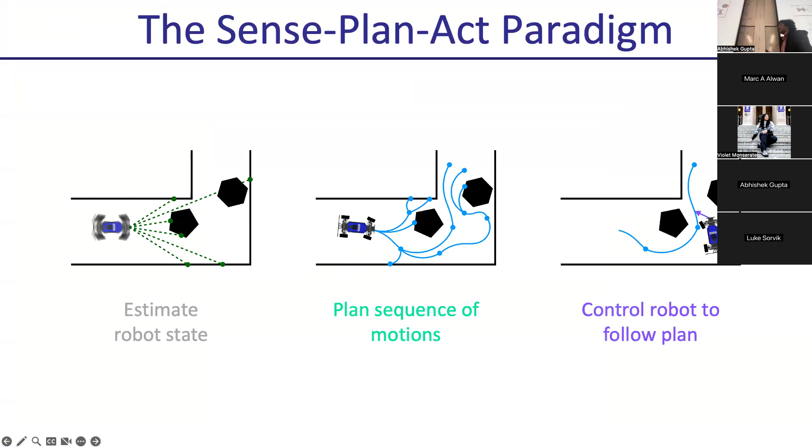So. Okay, so quick recap. I'll blaze through it. Tell me which parts I need to stop at. We talked about sense, plan, act, right? And we're thinking largely about control once you have a plan and a state estimate, right? And so specifically, we're thinking about feedback control. So a control system where you know the error between where you are and where you want to be, right? And so you measure the error between where you are, where you want to be, and try to take actions to minimize this error, right?

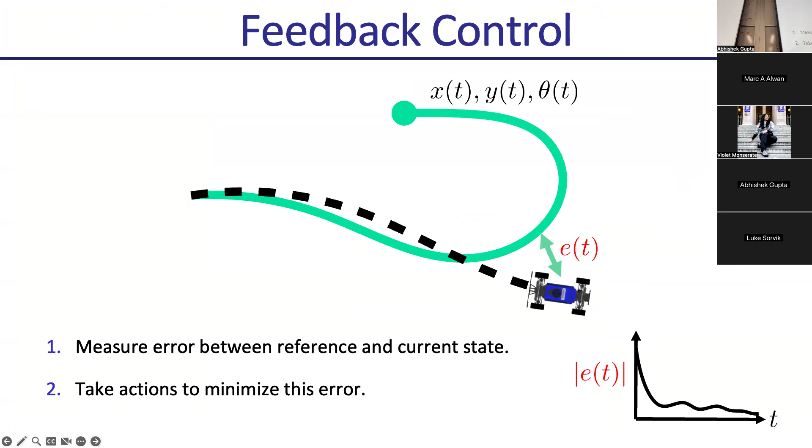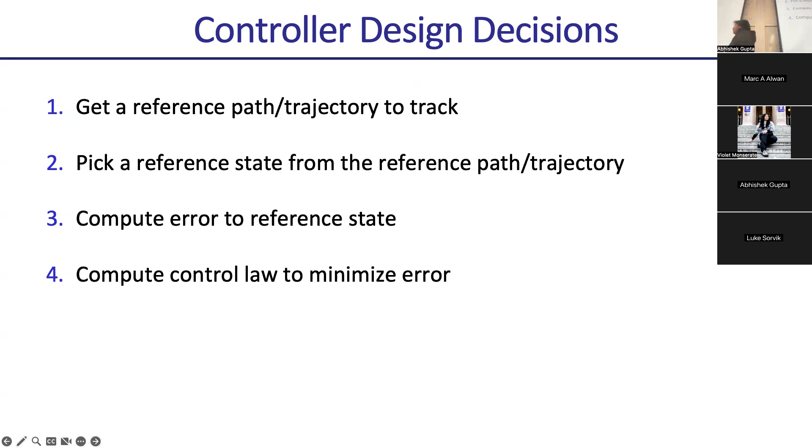And so we're trying to think of controllers that look like this, which gets a reference path or trajectory to track. You pick a particular point you're trying to go back to. You take the error between your current state and the reference state, right? And then you try to design a control law which minimizes this error. So it takes action so that your error becomes smaller, right? And so our focus today is going to be in designing this control law. So K here is a function that takes an error and gives you actions, right?

And so we're going to be trying to design the form of K, which is going to work generically across systems and specifically for the car, right? So PID control, which we'll talk about, is a very general system. A general control law works across lots of systems, whereas pure pursuit is very specific to the car, right? And so we're going to start with PID control, and then we'll get to something specific for the car.

And in general, we're going to think about a restricted setting where we don't change the throttle, we just change steering. And so if you remember last time, there was cross-track error and along-track error. If you can't change the speed, you can't change the along-track error, you can only change the cross-track error. Right? Because you can only change which way you're going. And so what we're going to do is try and change the steering angle so that we minimize cross-track error. Yeah. Okay.

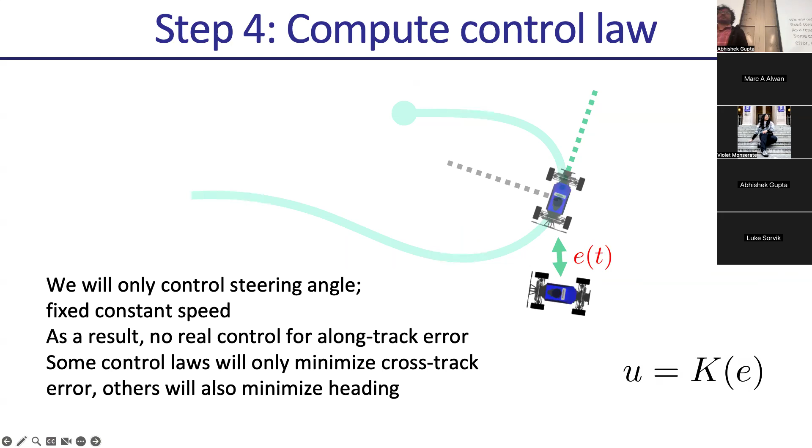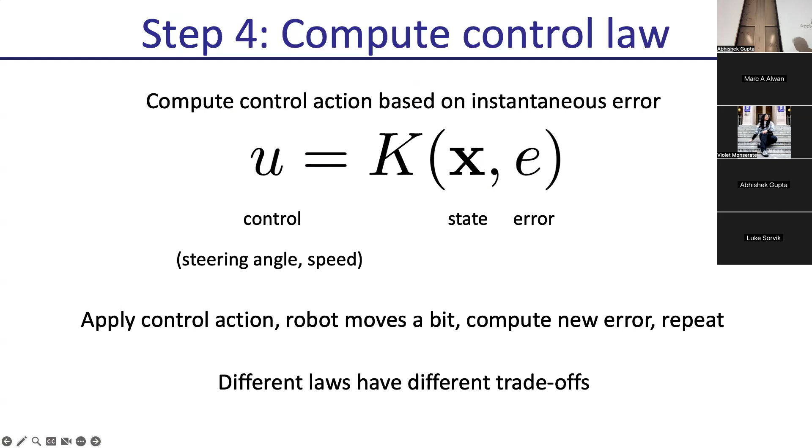So the basic design of a control law is you're trying to find out what U is, dependent on the current state X and the error between your current state and the desired state, right? And the desired target. And you're going to do this with feedback, which means you're going to apply the control law, you're going to move a little bit, and you'll apply this control law again, right? And so whenever you think of a closed loop system, it's going to have this kind of thing where you repeatedly apply the control law rather than just apply it once. And so that's the general space of things we're going to cover.

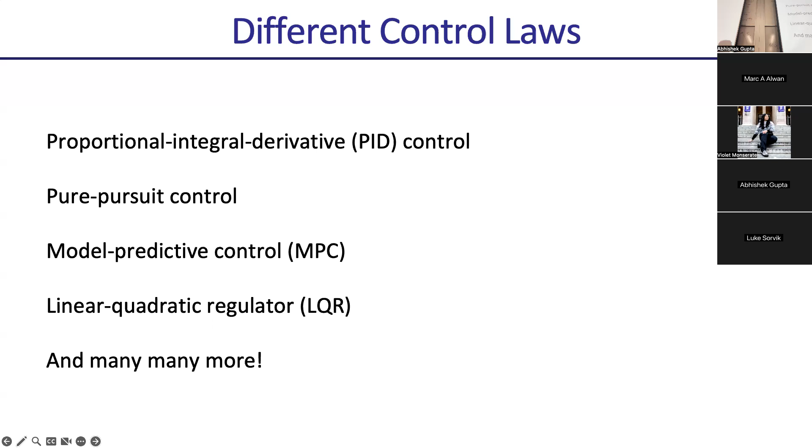We'll talk about PID control, then pure pursuit, then a more general space of things called model predictive control, which means you're going to keep replanning. And then we'll have LQR, which is a special case, which is quadratic and linear, and so on, right? So I think we've covered some amount of PID. You guys covered bang-bang control, is that right, last time? And then we'll cover PID, pure pursuit, and so on. That's a strange name, I know. But yeah, so we'll quickly recap bang-bang control, go through PID and pure pursuit. Yes? Tell me if my scoping is wrong because I wasn't here last.

Yes? Okay. So bang-bang control is really, really simple. It just says that if your error is positive, go negative. If your error is negative, go positive, right? So it's just saying that if you're this way, go that way. If you're that way, go this way. That's it. And you always set the actions to the max actions. And so you're always saying that if you're all the way to the right, you take the max action to go to the left. If you're to the left, you take the max action to go to the right. Now, what's tricky about this? What happens?

So as soon as you go across the line, you suddenly have to turn, but you overshoot. Right, exactly. So you start having behavior which looks like you kind of do this kind of thing, right? So you'll see wild careening around, and you'll never stabilize your system, right? And so stability is usually saying that you want your system to go to a fixed point, which is often set as 0, in the limit of time, right?

So different types of control theory are all about stabilizing systems, and so you're trying to stabilize your system to the 0 point, and bang-bang control is typically not stable, right? So it's never going to go to 0 error. And so the challenge with bang-bang control is that if you run this control, you tend to have error that never goes to 0. You go too far to the left, you go too far to the right, you keep repeating.

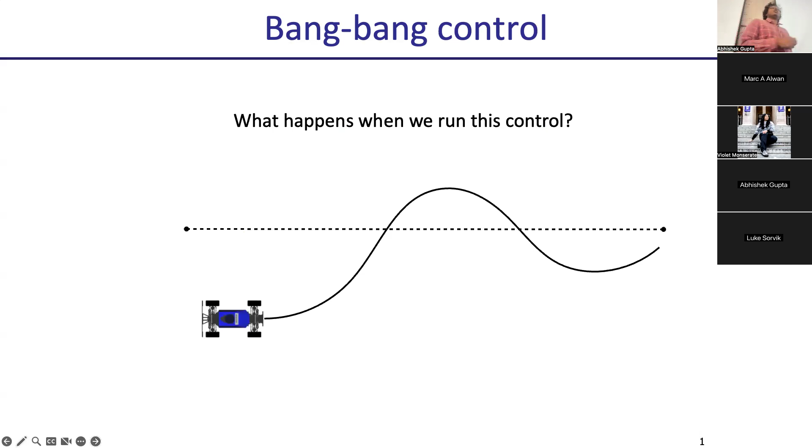So, okay. If we were to fix this, how do we fix this? We want to avoid this unstable, back and forth behavior. What do we do to make it better? Thoughts? Yes. As we get closer to the stable state, then we need to correct less, I guess. Yes. We dampen off this. So if you go back to this rule, what would you change? Make that proportional to the error. Make that proportional to the error, right?

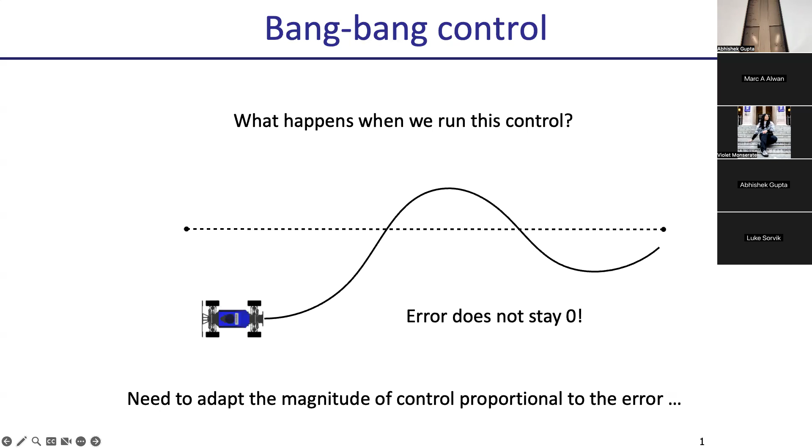And so the key point that Dhruvan is just talking about is, right now what's happening is over here, we're applying a big force, but over here, we're also applying a big force. Whereas over here, maybe we need to only apply a little force. And when we're here, we want to really apply 0 force. Right? And so our 0 actions. And so what we're going to do in PID control is we're going to adapt the magnitude of our control proportional to the error, not just max this way or max that.

Okay, so we want to do better, and that's where PID control comes in. So PID control is all about how do we build things proportional. It's called the proportional integral derivative controller. It's a PID. How do we leverage the magnitude of error to control how we move, right? And so basically, maybe Tyler told you about this, but almost every control system uses some type of PID somewhere. All our robots use PID controllers underneath. So even if you're doing deep reinforcement learning, there's still PID underneath in most cases, right? So it's useful to know.

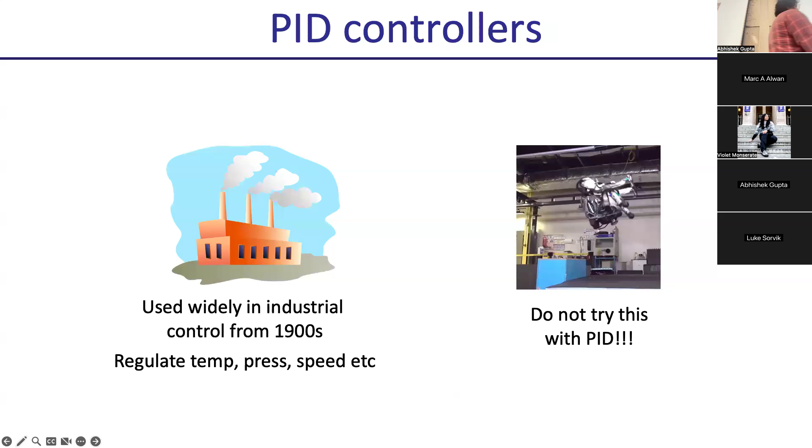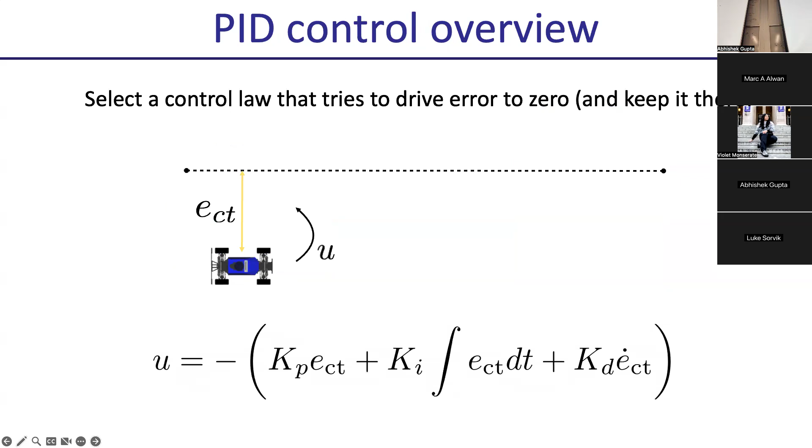The caveats here are it's great in certain cases. Don't do backflips with a PID controller. It's going to lead to problems because it doesn't really capture dynamics in a very nuanced way. Right? So don't use it there. Okay, so the crux of PID control is that you're trying to choose a control law that brings your error to 0 and keeps it there. And so PID controllers look something like this. It's going to be a proportional term, an integral term, a derivative term, right?

And so you can kind of think of this, it has a Christmas carol flavor to it. It's like a present, past, and future, right? And so this is your current error. This is the error that you accumulated in the past, and this is the error that you expect to have in the future, right? And so it's very similar to a spring damper system, if you ever heard of those in physics. This is kind of like your force, this is like your damping, right? And so it's got a similar flavor to spring damper.

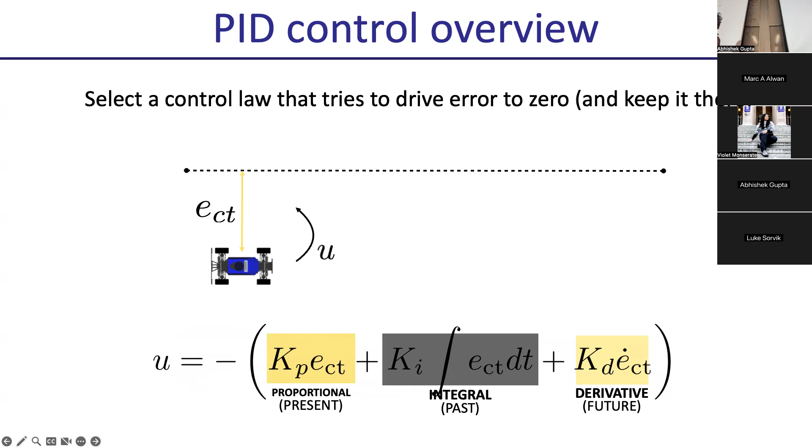And you can kind of think of it as, this is your set point of your spring. You're trying to design your spring so that it stabilizes like that, right? And so whenever I think of PID control, I think of it as a spring damper system. Okay, so we're going to have a proportional term, integral term, a derivative term, right? And so let's try to work through each of these. So the proportional term says let's minimize the current error. You have some error, you want to get back to this 0 point as quickly as possible, and so you're trying to minimize the current error.

What the integral says is if you're accumulating error, try harder, right? So it means that I've tried pretty hard with my proportional term to get to 0. It's not happening. Try harder, right? So the integral term is really connected to an idea called adaptive control. And adaptive control basically says that you have a control rule. If your control rule is not getting you to where you want to be, change the control rule, right? Whereas proportional control is not changing the control rule. The control rule is always linear in error. But integral control accumulates error, and so it's inherently adaptive.

And derivative is kind of like brakes. It's like damping, saying that if I'm going too fast one way, just slow it down and try to not have wild instability in your control. So you can kind of think of your proportional term as doing a lot of your heavy lifting.

And then your integral term is trying to reduce steady state error. Reduce steady state error means that if you're trying to converge to this point and you're not converging, it forces you to converge. And you can think of your derivative as preventing this kind of high frequency behavior, right? So it tries to penalize high frequency behavior. That makes sense intuitively?

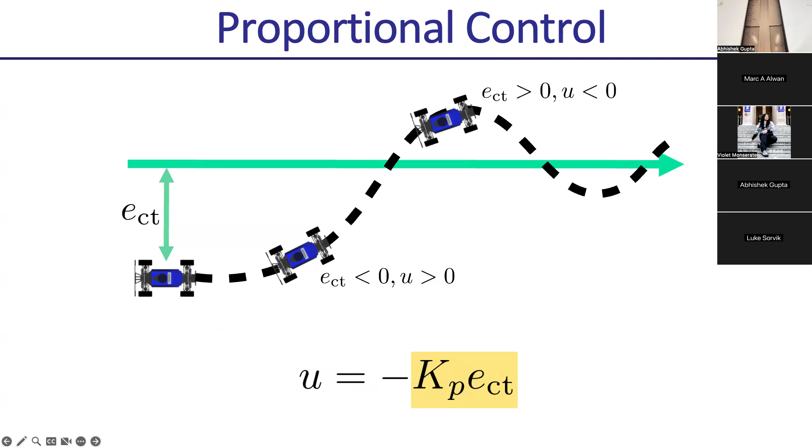But if you look at the amplitude of this, it's going to be smaller. And usually most of these systems will do something like that, so it goes to zero over time. And in a certain set of conditions, you can show that the PID controller is stable. Okay, so this thing, KP, is often called your gain. Let's try to understand what happens. You're going to tune the gains in your next homework.

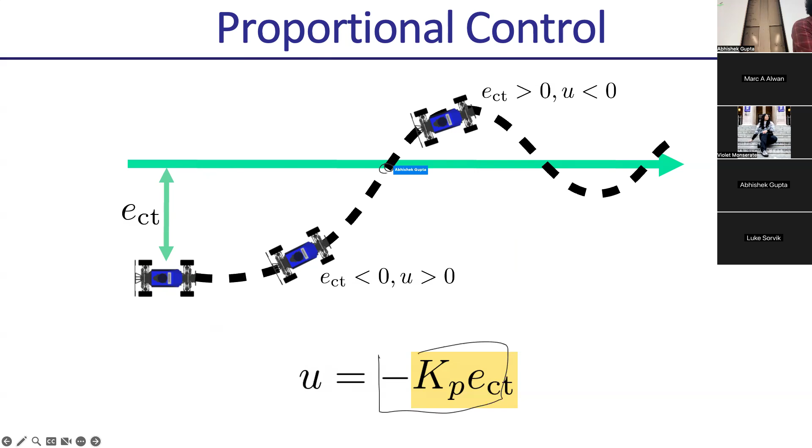So what happens if the gain is really high? Yeah, it oscillates more. Think of it as a spring which has a huge spring constant. So if your gain is really high, your force is going to be quite large, but because you have momentum, you're going to overshoot more. So you have a system that will tend to overshoot, that looks something like this, and have high oscillation.

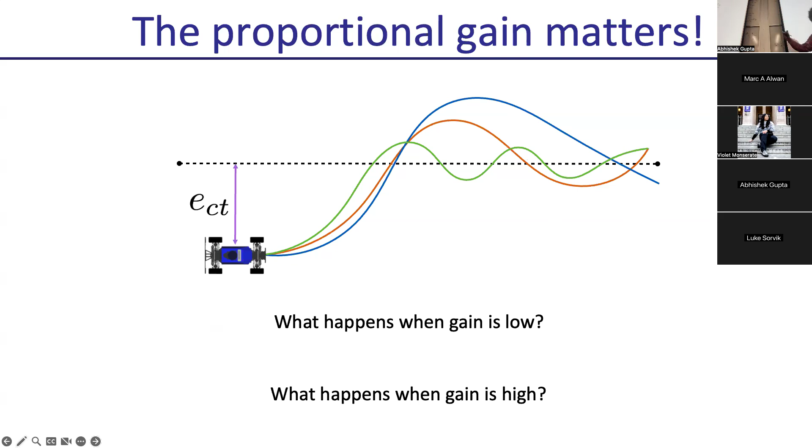Whereas if your gain is low, it's like a loose spring. I'm trying to go back to the middle, but I don't have enough force to overcome my momentum, so I'm just going to swing around, go slowly. So you can think of low gain as not as much oscillation, but slowly getting to the optimum. Whereas when the gain is too high, you get to the zero point fast, but then you oscillate a lot. That's the way to think about the P term.

One way to think about it is if your gain is too high, it's like a cat chasing its own tail. You go here, and this sends you all the way here, and this sends you all the way here, and you keep going like that.

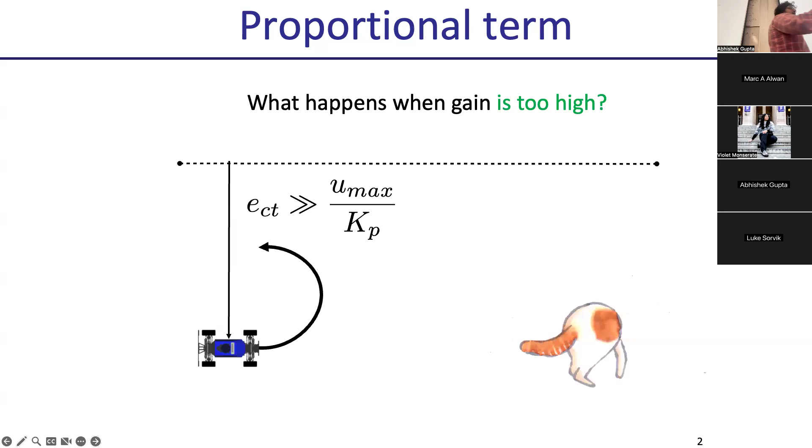So if you ever run your systems and find that they're jerky, like if you're running a robot arm and it's jerky, try lowering the gains. But if you're finding that your arm doesn't reach where you want it to reach, then up your gains. So just a simple linear tuning. Okay. That makes sense? The P term. Any questions?

Solid. Okay, so the next thing is the I term, which is interesting. So the I term says that it's an adaptive controller. It's the integral, which is saying let's sum up the error over the past some number of time steps, right? And it's using something proportional to that error. So it's saying, again, it's negative Ki, but not times the current error, it's times the historical sum of the error. So why does that make sense? Where would that help?

So you're going to have some steady state error, which in a chemical plant may mean that you just get stuck at some point which is not your set point. Or a robot arm gets stuck somewhere which is not the place you want to go because of forces on your system, or disturbances. And so what this guy is saying is, let's say you had wind and Kp fighting each other and this error was non-zero. So you have some non-zero steady state error.

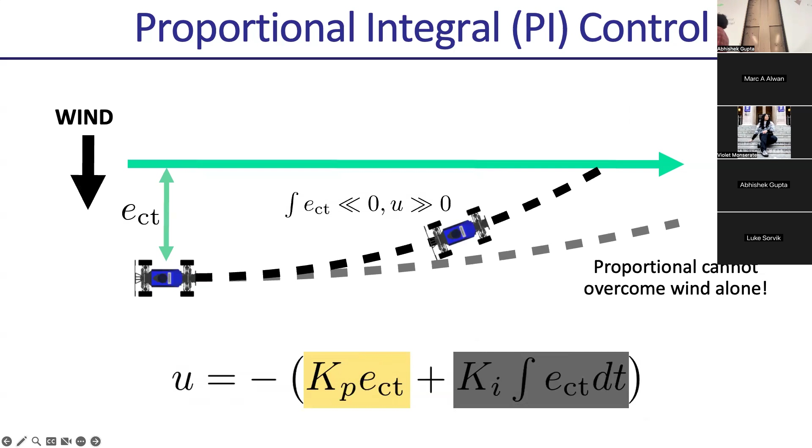So what we're saying here is that if you have a system which has some steady state error due to a disturbance, what the I term lets you do is overcome that steady state error. Your I term is not going to dampen your oscillations or anything like that. Your I term is really saying, hey, your output didn't converge to where you want it to be. And so it's going to give you that extra bit of juice that's going to get you to your set point.

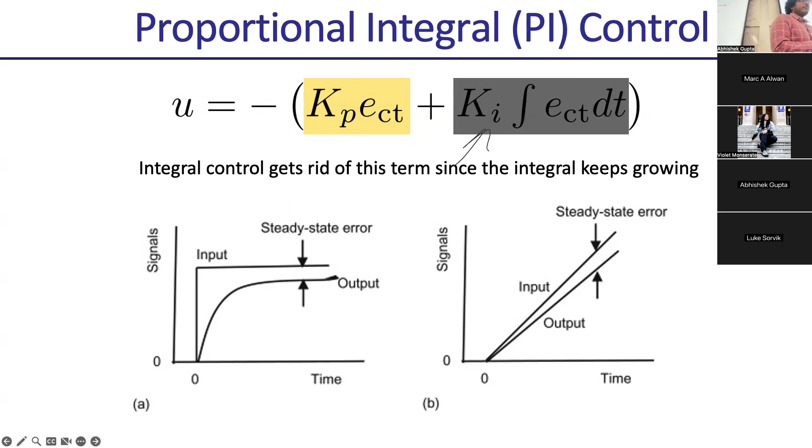The way I like to think about it is this thing is going to keep growing until your e(t) is zero, at which point this remains constant. It's an integral, so if e(t) is zero, it remains constant, which means this term doesn't grow, and you stay at your set point. So you can think of it as a little bit of extra force. Now there are more sophisticated ways of doing adaptive control. This is a linear way of doing it with an integral. You can also have a nonlinear function, and a lot of reinforcement learning is trying to get these kinds of adaptive controllers with nonlinear functions. Okay.

But that's integrals, right? And then the last thing we have is the derivative. So that's Kd times e dot, where e dot is the rate of change of error. In some sense, the rate of change of error is telling you what is your predicted change in error at this instantaneous point, and you're trying to penalize it. So if you're going too fast one direction, it's going to apply force in the other direction to slow you down. It's like the damping in a spring damper system. It's saying, hey, you're zooming too fast to the middle, chill out, slow down, right?

You can think of an integral as a sum of things in the past. You can think of a gradient as predicting the future - it's a gradient with respect to time, an instantaneous prediction of what the next step is going to be. So you can think of this as a term which prevents big oscillations, and it's trying to get you to converge more smoothly to the steady state.

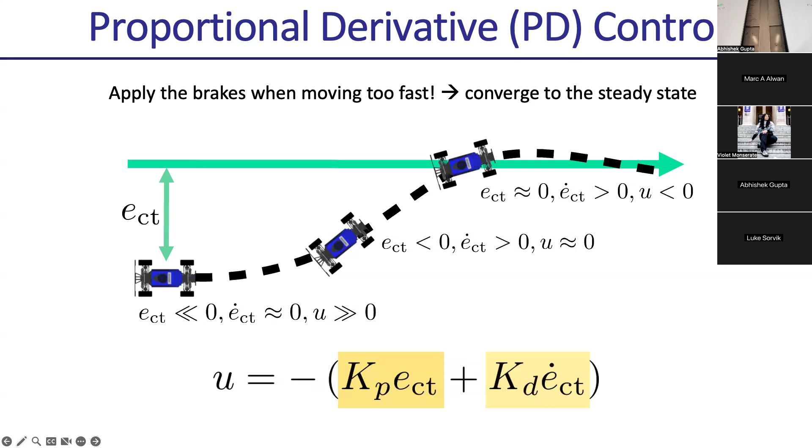The derivative term is KD times ECT dot - remember, this is cross track error. So how do we compute ECT dot? Whenever you say dot, that means derivative of ECT with respect to time. So you want to compute the derivative of ECT with respect to time. How would we do that?

Really, basically take where you were some amount of time back, predict that you will - that's right, so it's numerical differentiation. You basically say, hey, you were here at ECT at the current time step, you were here at some time step before, minus delta t. You take ECT minus ECT minus delta t, divided by delta t, which gives you your derivative - it's just numerical differentiation, often called finite differences. You're taking a finite difference in time, and you can compute the gradient.

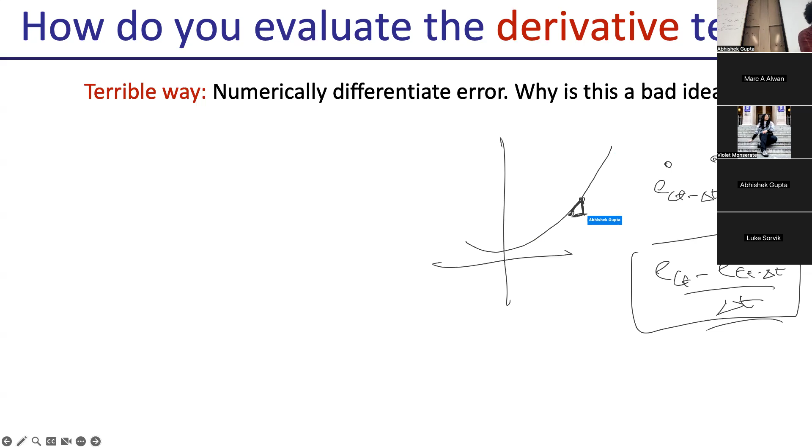So if you imagine you had a function and you want to compute its derivative, you can take this point, take this point, look at their difference in value, and divide by how different the points were - that gives you the gradient. You can do the exact same thing here, but as I've written up here, it's not a great idea.

Why is it not a great idea? Your sensor readings may be noisy - this high variance thing propagates. So what we're going to do instead is analytically compute the derivative, because we know this system. If you remember the way we computed it last time, you took x minus x ref, y minus y ref, and you had a rotation matrix. So you know what ECT is going to be, which means you can take its derivative.

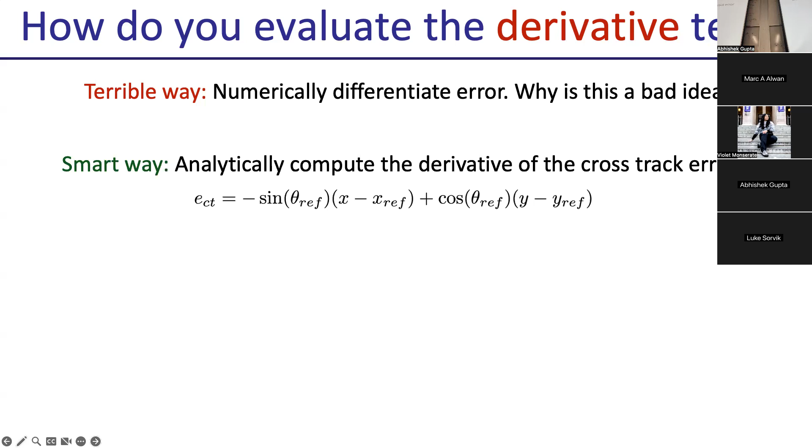So to take its derivative, you take the gradient of this thing with respect to time. Some things here are constants - x ref, for instance, is a constant, y ref is a constant. So you can say the gradient of this thing is going to be minus sine theta times x dot, plus cosine theta times y dot. Let's work it out slowly: ECT is minus sine theta times (x minus x ref) plus cosine theta times (y minus y ref).

Or theta ref - now this is a constant, so the only things that change with time are x and y. So what you'll get here is that if you take the gradient, it's going to give you minus sine theta ref dx/dt plus cosine theta ref dy/dt. And that's the first step. Then if you remember what we did in the motion model, dx/dt was just v cosine theta, and dy/dt was v sine theta.

You're just projecting the velocity along x and y. Remember the car was going like this, so the velocity was this way. You say that the change in x is v cosine theta, change in y is v sine theta, right? You just project it onto the right axis.

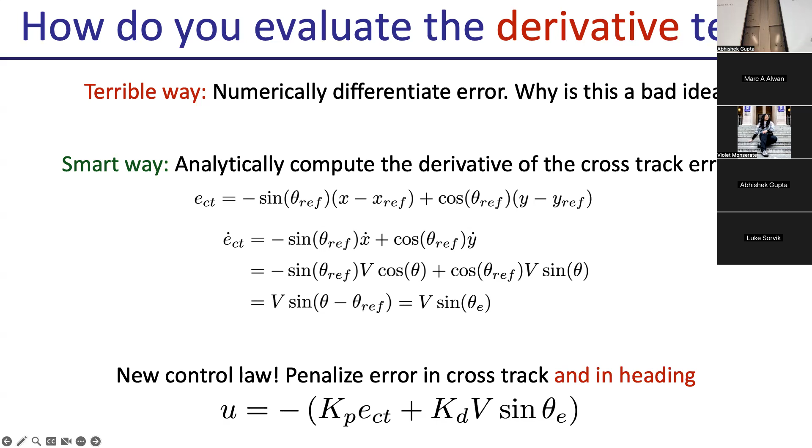You don't have to do any numerical stuff, you can just replace it by V sine theta, right? So in your homework and so on, when you're doing PID error, just replace your derivative term with V sine theta. So that's kind of why we're using the derivative term.

Now a challenge here is that, as Marc was talking about, there's potentially lots of noise and variation. And so what happens with noise and variation is it's hard to separate signal from noise, which means your gradient may appear really high even though it's not. And so sometimes when you have this kind of sensor noise or actuator noise, your D term leads to huge control variations because your gradient is high, but not because the system is moving too fast, more because there's just noise in the sensors.

And so often you will actually drop the D term because it's sensitive to really noisy things. So in practice, a lot of controllers we use in the lab are just PI controllers, and they don't always have the D term.

Okay, so some intuition here is that your proportional term says minimize the current error. Integral says if I'm accumulating error, try more. And derivative says put on the brakes, slow down, right? So that's the whole of PID control.

Questions? Yeah. For defining the actual rotation based on... So this is to control the steering angle. Right, so we're only saying you're only controlling the delta.

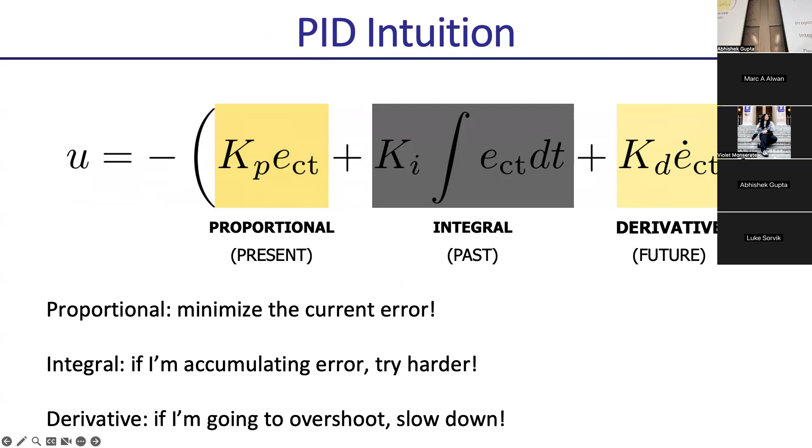Like if you're finding that you're just not getting to the point you're at, up your I term. If you're going too fast and oscillating, maybe increase your damping term, right? But in general there's a bunch of literature on this.

We're not going to go into too much detail, but one of them is called the Ziegler-Nichols method, where they have a heuristic rule that looks something like this. It's totally heuristic, just done with experimentation, but the procedure kind of looks as follows.

You start by just setting a P term. You set Ki and Kd to 0, right? And what you're going to do is allow your system to go to a steady state and kind of oscillate, right?

And then what you do is you set the command to a step function or to 0. You increase the Kp term until your system goes and oscillates. You use that to determine the frequency of your system, and that is used with these rules to set your Ki terms and your Kd terms.

Right, and so I don't have a great explanation for it, except they tried a bunch of stuff and one of them worked, and that's it. But there's a bunch of methods like this that allow you to tune the PID controller. So in your homeworks, if you're feeling adventurous, try it out.

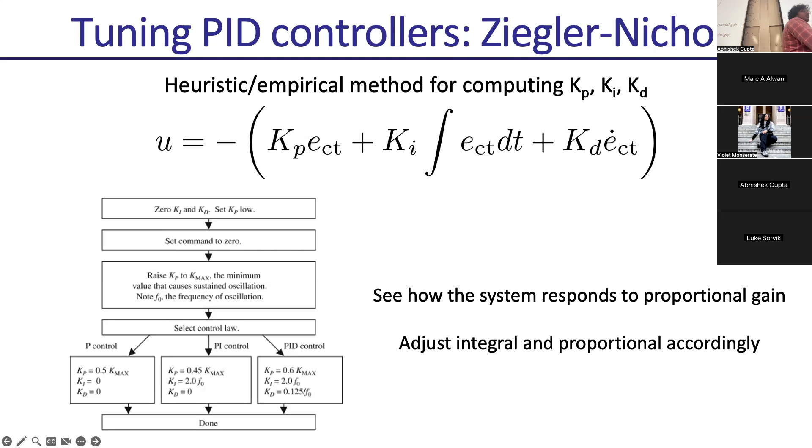Cool, so that is PID control. How do you feel about it?

Easy peasy? Good, alrighty. So the next thing we're going to cover is this thing called pure pursuit.

Pure pursuit is a form of lateral vehicle control, but it's a way to control specific vehicles like cars and planes. You can think of it like a carrot on a stick: you set up a target, try to go towards it, then you move the target. You're always chasing a carrot on a stick, giving yourself a target in front, trying to reach it, then the target moves, and you keep following the goal.

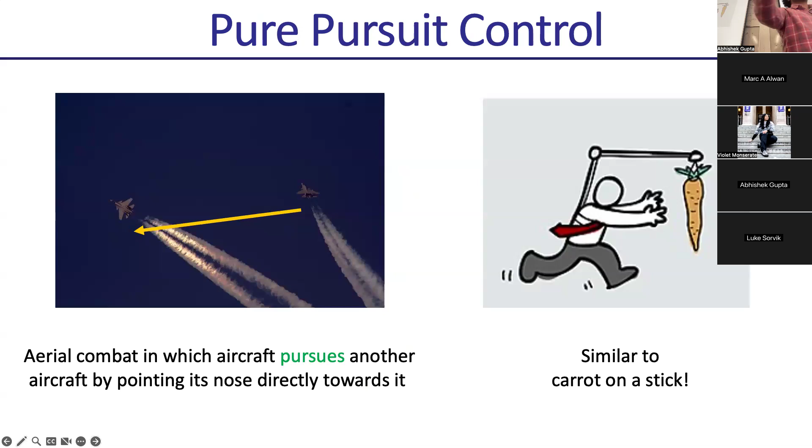An analogy the original paper uses is following an aircraft: you point your nose towards it, the aircraft moves, you point your nose towards it again, and repeat. So it's literally pursuing.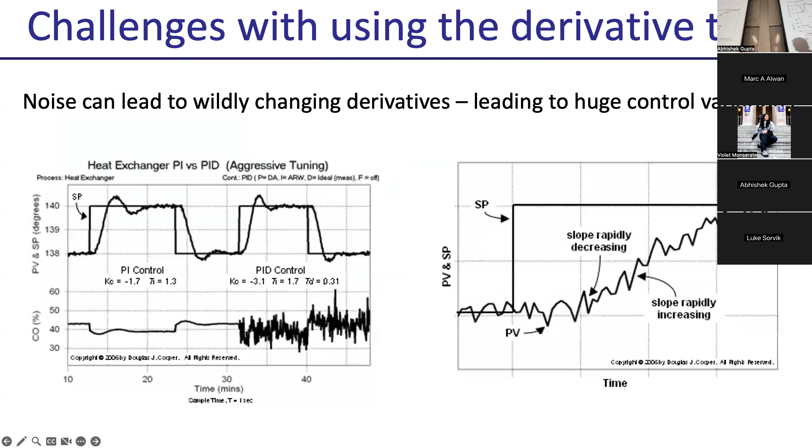So why do we need pure pursuit? Well, the problem with PID control was that it did not use the model at all. You can apply a PID controller to any system. If you look at PID control, there's nothing about the model, it only has to do with the error. It's just a heuristic line follower: if you're this way, go that way. But it doesn't use the model at all.

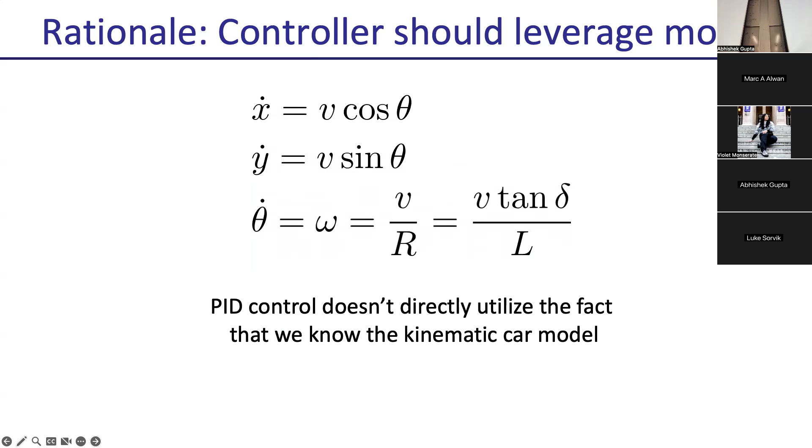What pure pursuit is saying is, hey, you're in a system where you know the model, so why shouldn't we use it? If you have the model, use the model. Whereas with PID control, it's really general, it works across lots of systems, but it doesn't use the model. So the motivation behind pure pursuit is to build a rule that follows paths for the car specifically. It may not work for other systems, but it'll work for the car.

The key insight here is the car is always just moving in circles. This leverages the fact that, if you remember how we derived our motion model, the car tends to move in a circle - there's an instantaneous center of rotation. So if a car is translating and rotating, you can think of it as rotating around an instantaneous center of rotation. We're going to leverage the fact that the car moves in circular arcs in order to navigate places.

One way to think about it: you have a path you're trying to hit, let's say this is your point you're trying to hit. What you can do with your controls is change the radius of this circle, trying to change it so that your arc intersects with the point you care about. So all that pure pursuit is trying to do is determine what your angle of steering should be.

What is your angle of steering so that the circle your car makes intersects with your lookahead point? All it's trying to do is inverse solve for delta such that the desired radius hits the lookahead point, the reference point you're trying to get to. So all we're going to do is a bit of geometry to get the radius of the circle that'll get us to where we want to go.

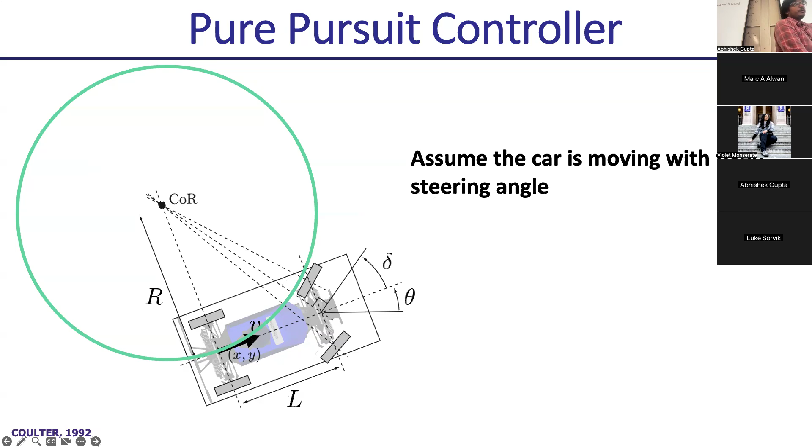Let's consider how we did look ahead: we were trying to choose a point to get to, which is not the nearest point, but a little look ahead. We can say the distance between (x,y) and (x_ref, y_ref) is equal to L - we're looking ahead to a point a distance L away. Just to avoid notational confusion, let's call it LD, because earlier we had the car of length L, so now we'll call it LD.

So how do we choose this? How do we choose a steering angle that gets the car to go through here? You choose a lookahead point, you get a steering angle that goes through there. Once you're there, you choose a different lookahead point, so you go through here, and a different one again after that. It'll trace out a path like that, but using the specific model of the car to do it.

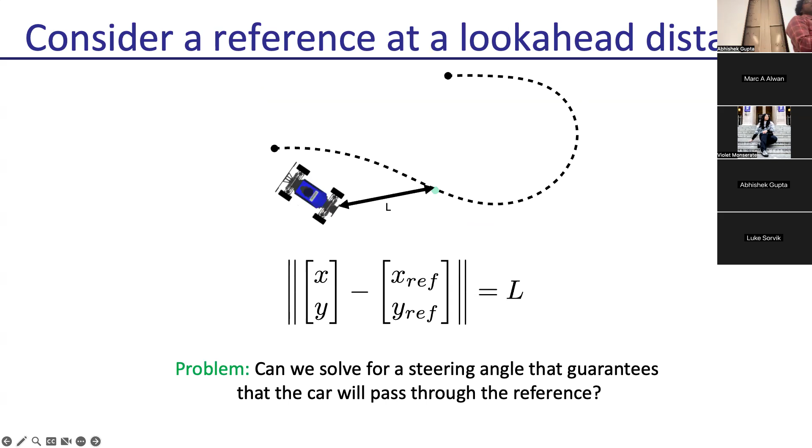And so the idea here is we want to solve for an arc that passes through a look ahead point, right? And as we move forward, the point is going to keep moving. So it's not that we're going to go here and stop. It's more that we're going to go here, move a little bit, the point changes, move a little bit, point changes, move a little bit. It's going to be relatively smooth.

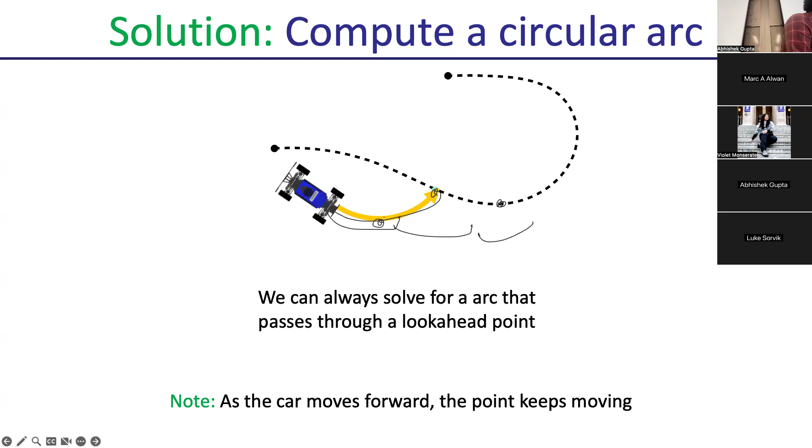Okay, so we're going to keep changing the look ahead. That's going to kind of keep us on a path that looks like this. So the procedure looks like: find a look ahead, compute the arc, move a little bit forward along the arc, right? Let it happen for a little while, and then go back to step one, recompute your look ahead, compute your arc again.

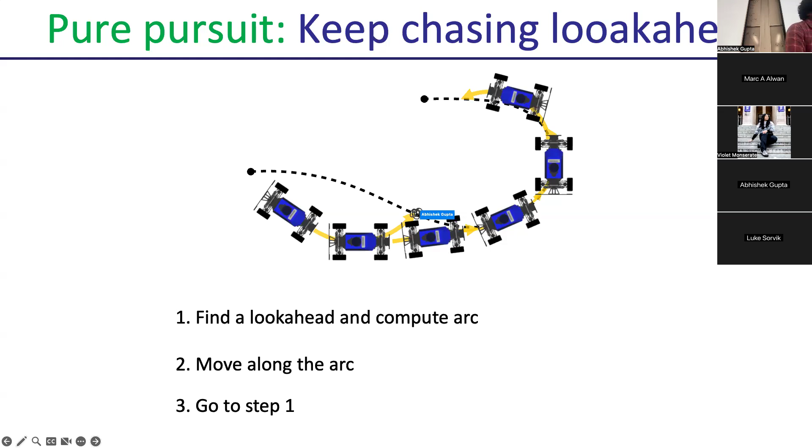Okay, so what we're going to try and do is just a little bit of geometry that's going to choose a radius that is going to take us through a particular look ahead point. Yep. Okay, so let's start by reviewing our motion model, right? If you're trying to find the center of rotation, we're going to say your velocity was v, your theta was the angle that your car is currently making from the x-axis, and delta is your steering angle, right?

So we said that x dot is v cosine theta, y dot is v sine theta. Theta dot, which is the rate of change of theta, is v over R, right? So this is the angular velocity, which is equal to your velocity divided by your radius, the distance between your car and the center of rotation. So those are things we already did.

And when we worked through some algebra here, we just said this was delta, this was 90 minus delta, this was delta, right? So if you remember what we did, we said tangent delta is equal to L over R, which means that R is equal to L over tangent delta, right? Which means that the radius that you pick is dependent on the length of your car and the choice of steering angle.

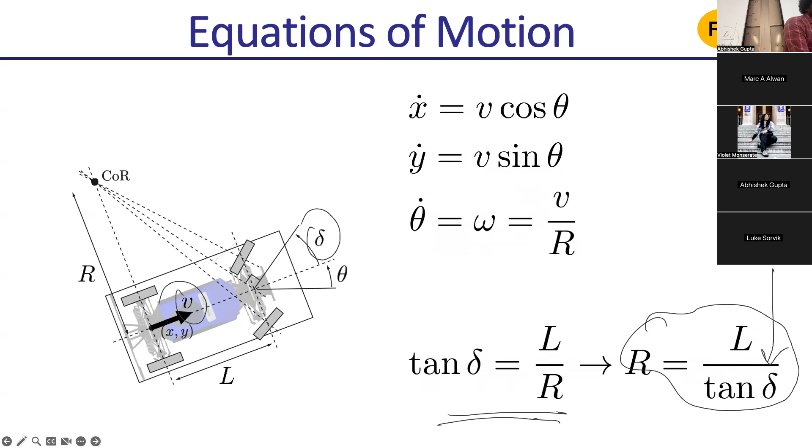Okay, so we know that R is equal to L over tangent delta. And we are going to try and figure out, in our case, how do we choose delta to intersect with our point? And so specifically, we're going to say, our car is here. We want to get through some x ref, y ref, right? And we're going to try and decide what the delta is to get there. And so we're going to do a little bit of geometry here.

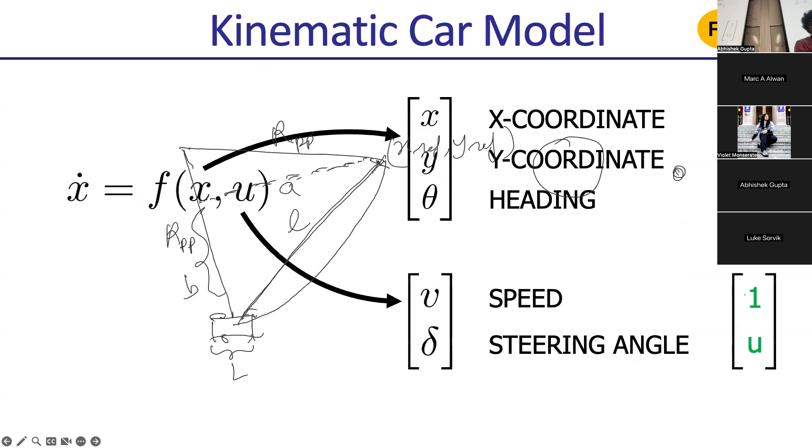So here's the logic. In our previous slide, we tried to get tangent delta in terms of L and R. But we don't know R. So we're going to try to write R in terms of things that we do know, which is x, y, the reference point. So we're going to express R in terms of x, y, x ref, y ref, so that we can solve for delta.

So the logic we're going to follow is we know from our motion model that tangent delta is L over R. We're trying to find the right R to get us to the reference point. So we're going to solve for R in terms of x ref, y ref, x and y. Once we solve for that, we substitute it in here, and you can directly get what delta is going to be. You get this into all known quantities, and then you know how to compute the control.

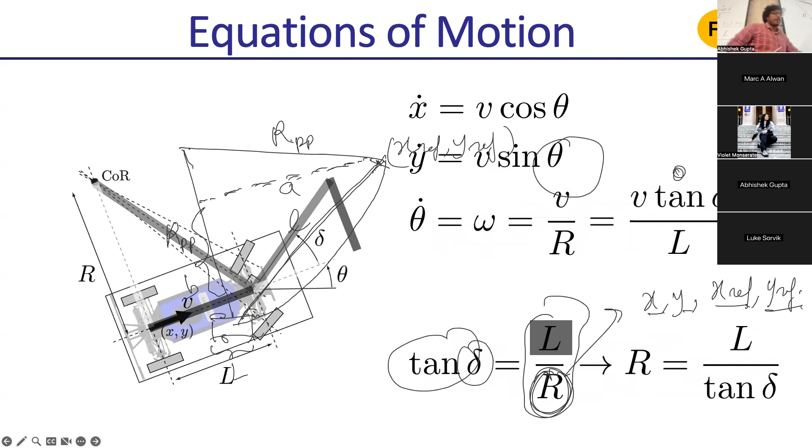So you can think of our logic here as: tangent delta is equal to L over R. We don't know what the right R is to get us through the point of interest. We're going to solve for R in terms of x, y, x ref, y ref, and then substitute that in here. You just take inverse tangent, that gives you the steering angle. That's our control rule.

I guess we're dealing with vectors, right? So your subtraction will just have the opposite sign, but symbolically it'll remain the same, whether it goes this way or that. Good question.

Okay, so we're going to call this thing A, and this thing B. The first thing I'm going to do is write RPP as some function of A and B, and then we'll solve for A and B in terms of x ref, y ref, x and y. So delta is equal to tangent inverse of L divided by R. We solve for R as a function of A and B, solve for A and B as a function of these four things, and now you get delta as a function of everything that you know.

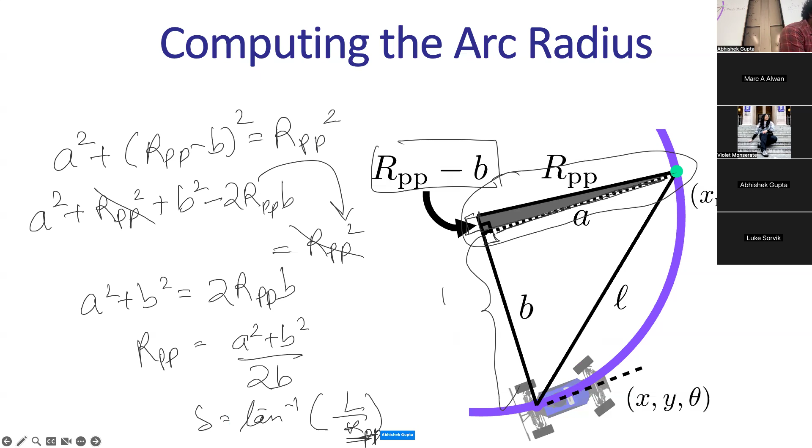Bear with me, just a little geometry. That's it. Okay, so we typeset that. You get R is A squared plus B squared by 2B. And now what we want to do is write A and B in terms of x ref, y ref, x and y.

Yeah, and theta. So the way we're going to do it is a little bit of a change of frame of reference. You can think of it as take this whole thing and rotate it so that the car is facing vertically up, like rotate this whole thing counterclockwise. And so the whole system starts to look like this. This is your car. This is where you wanted your car to be, right? And so you're trying to follow this arc here.

If you rotate this thing, you're going to have your circle, same as before. This is going to be L, this is going to be R, this is going to be A, B, and R minus B, right? So just think of rotating the whole frame of reference. The reason is it'll just be easier to compute A and B. In this frame of reference, it's just the difference between x and xref, yref and y, and you're going to rotate it. Because in this frame of reference, B is the difference between these points, and A is the difference between these points, because it's axis aligned, right?

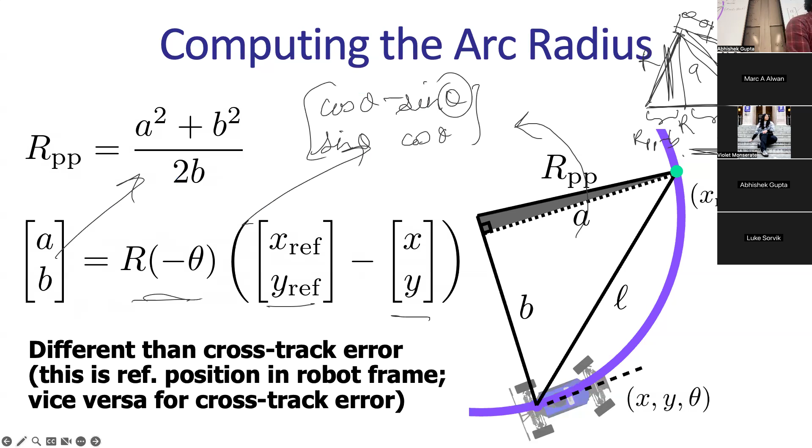We know the rotation matrix, right? It's cosine theta, minus sine theta, sine theta, cosine theta. You're just going to substitute in minus theta because you're rotating this way. And you know xref, yref, x, y, and theta, so you directly get what A and B are. You can stick A and B into here, and stick that into your controller. Do I have a typeset here?

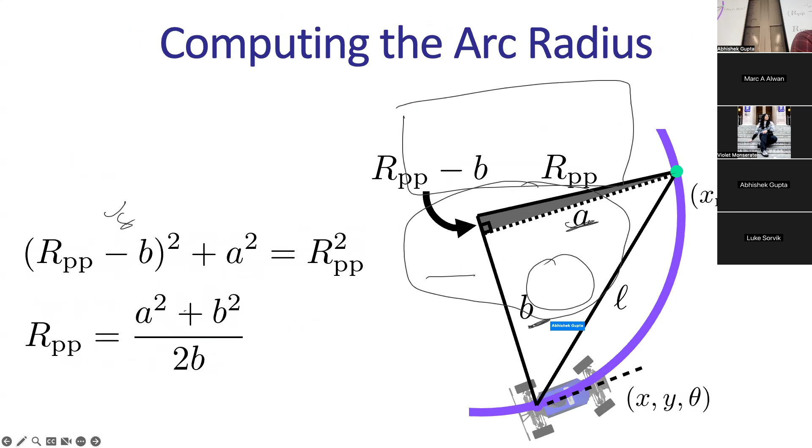Okay, so let's put all the pieces together. We said that tangent delta is equal to L over R. If you remember, we did a bit of geometry. Say this is delta; tangent delta is L over R. We didn't know what R was going to be, but we said R is A squared plus B squared by 2B. We wanted to compute A and B in terms of these things. So A and B is cosine theta, sine theta, minus sine theta, cosine theta times x ref minus x, y ref minus y.

Just rotate it, and that gives you A and B. Stick A and B into here, get R, stick it into here, take inverse tangent, and it gives you the steering angle. You've solved it analytically, using the model of the system, the fact that it's a car. If you look at the videos I showed you at the start, like the DARPA Grand Challenge and the Urban Challenge, a lot of them just use this controller. So it's not just a toy thing we made up; it's something people use or have used in practice.

Cool. Does that make sense? We went through a bunch of geometry, but really just think about it as choosing the radius of the arc that gets you through the point. You're solving for R in terms of A and B. A and B is just take the difference and rotate it with your rotation matrix.

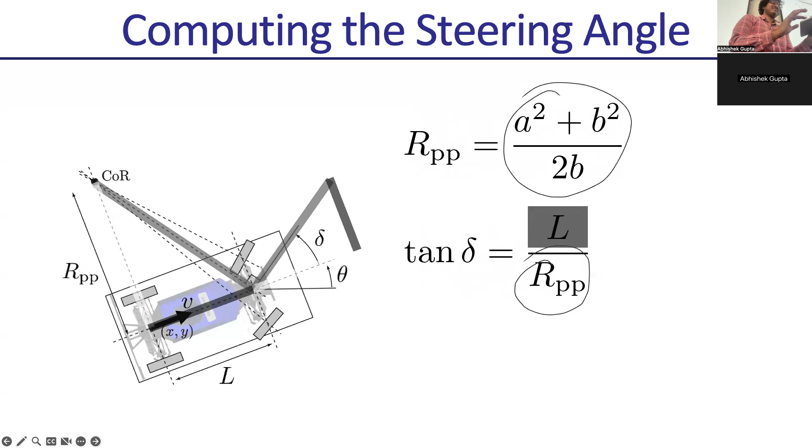Was the talk recorded? They're all recorded, yeah. Just go to the UW CSE page and they're all on there.